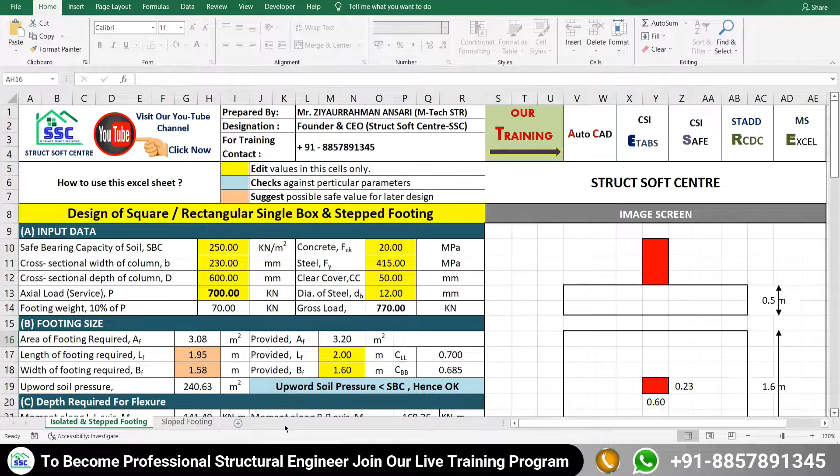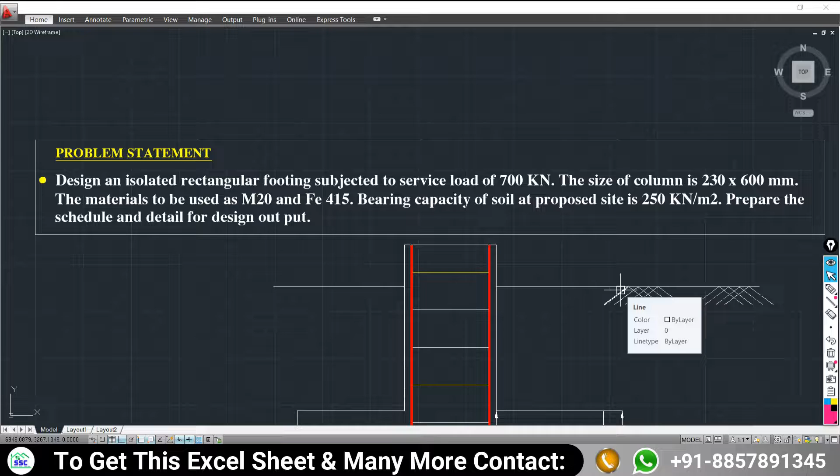So first of all, we are trying to understand the problem statement. We have to design an isolated rectangular footing which is subjected to 700 kilonewton service load, and the column carrying this service load has a size of 230 by 600 mm. The material we have to use for the design of this foundation will be M20 and Fe415. And the most important data, the bearing capacity of the soil at this proposed site, is 250 kilonewton per meter square.

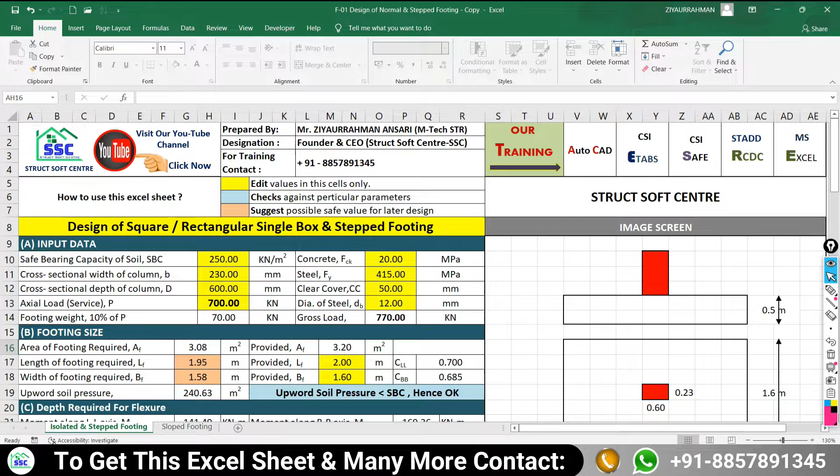And our job is to prepare the schedule and detail for the design output. So to solve this entire problem, we are going to use this spreadsheet. All the basic data first we have to put into this Excel sheet, then we are going to find out the solution, and whatever solution we get, we will prepare the schedule accordingly.

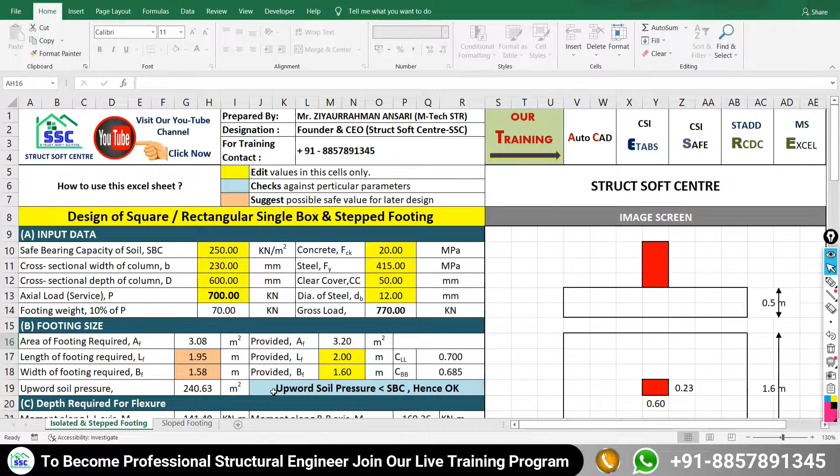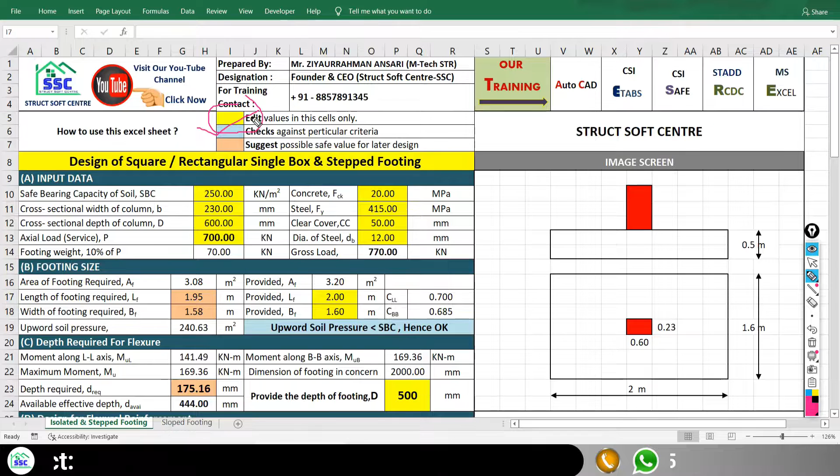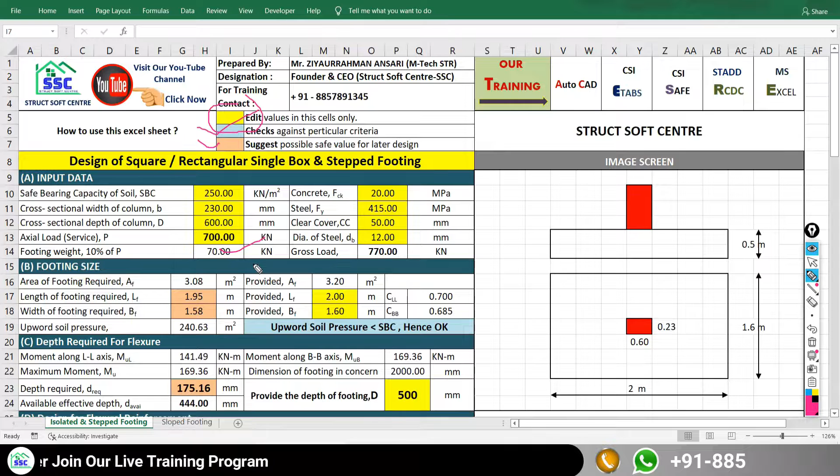So first of all, try to understand how to use this Excel sheet. You have to edit the value only in these yellow cells. The sky blue color cell will perform the checks against the particular criteria, and the orange color cell will suggest the safe value for the later design. You don't need to worry about the white cells because the formulas are fitted in these white cells. Whatever basic values you put in the yellow cells, the white cells will adjust accordingly as per the calculation. So you don't need to worry about the white cells, only put the basic data about your problem in the yellow cells.

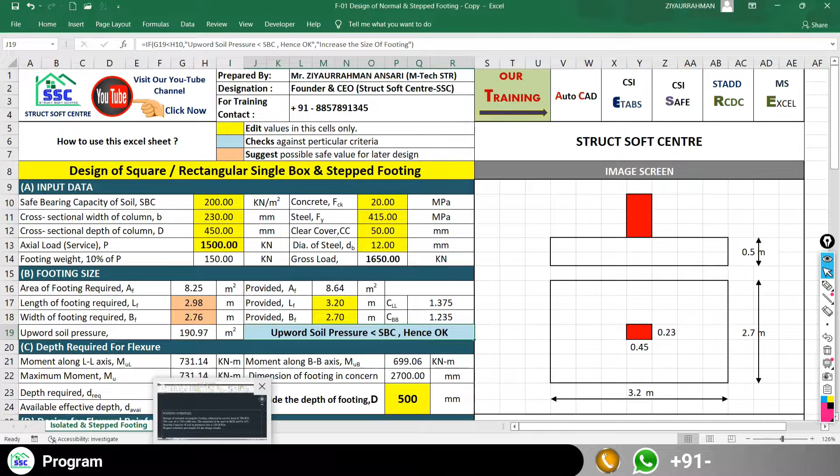Now we have to put here the basic values like what is the bearing capacity of the soil, what is the material properties, what is the section size of the column. So we need to look once more at our problem statement. We have to design an isolated rectangular footing, we know that. What is the material properties? We have to use M20 grade of concrete and Fe415 grade of steel.

So come back to your sheet, and yeah, a drop down list is available, so I can change accordingly. M20, and we have to use Fe415 grade of steel. All the grades of steel are available here, so I am going to take Fe415 accordingly.

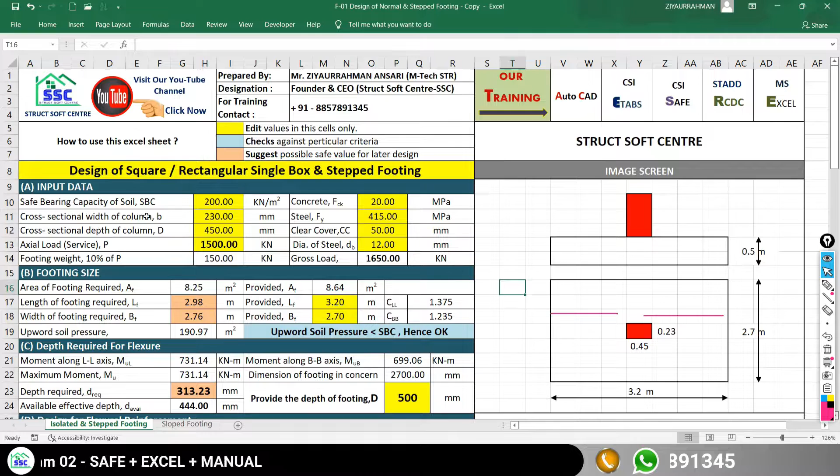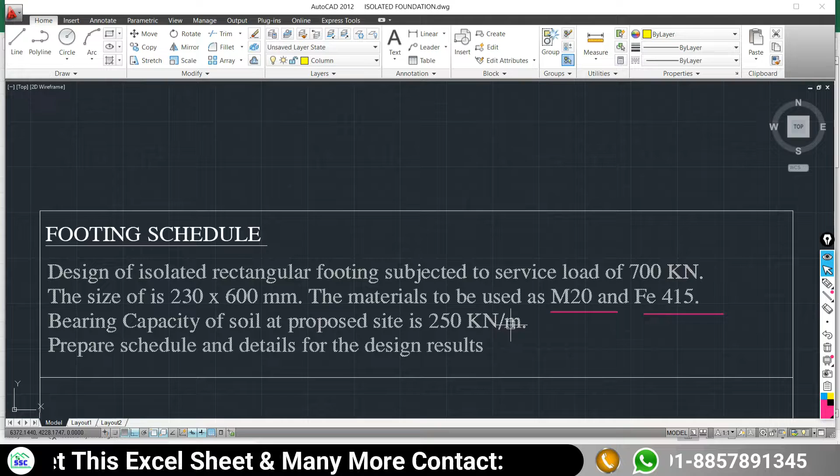Now what is the bearing capacity of the soil at the proposed site for your problem? The bearing capacity of the soil as given here is 250 kilonewton per meter square. So just go back and put here 250 kilonewton per meter square.

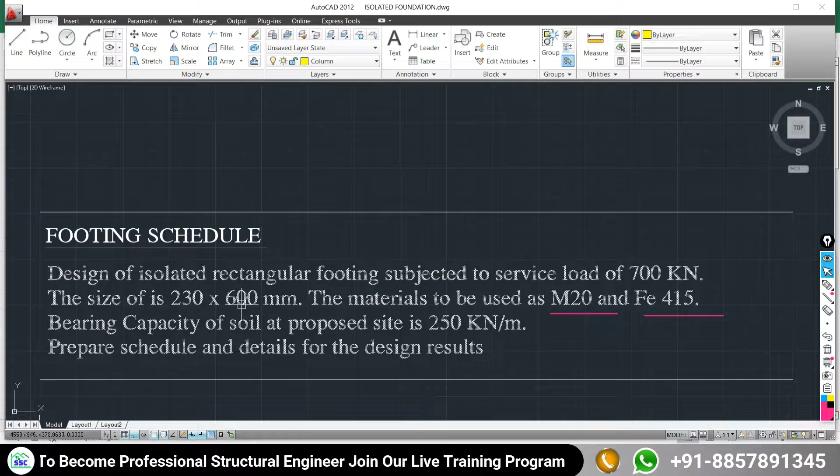What is the column size? The column size is 230 by 600 mm. So just go back and put here 230 by 600, the section size of your column.

How much service load is coming to this particular footing through the column, that we need to know. It is also available in your problem statement. It is 700 kilonewton. So just go back and put here 700 kilonewton.

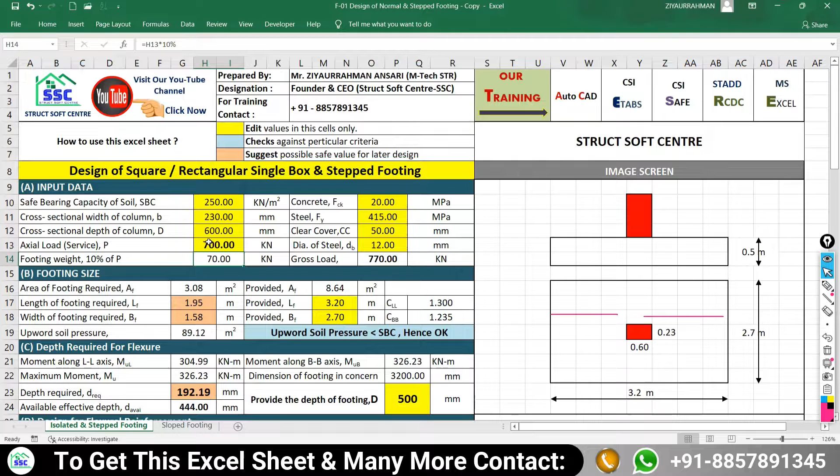Now next will be what? We need to add 10% self weight of the footing. Actually the load coming from the column, this 700 is the service load coming from the superstructure only. But when you are going to impose the load over the soil mass, the weight of the footing will also be added. But initially, we don't know what is the size of the footing, and if you don't know the size of the footing, you won't be able to calculate its self weight.

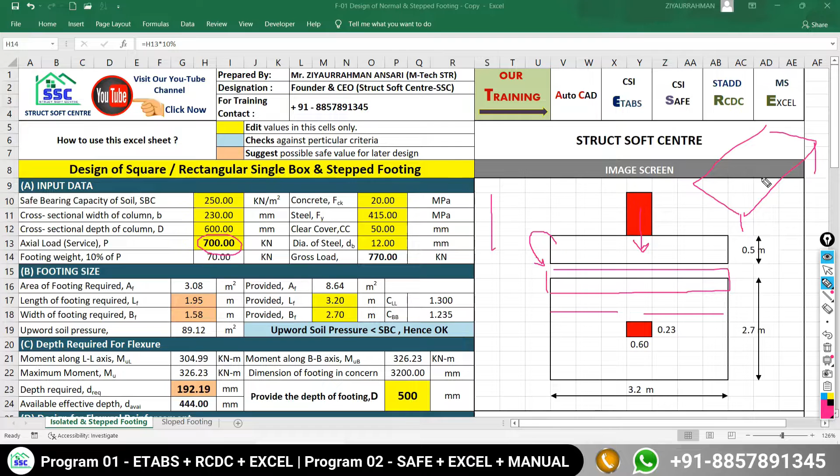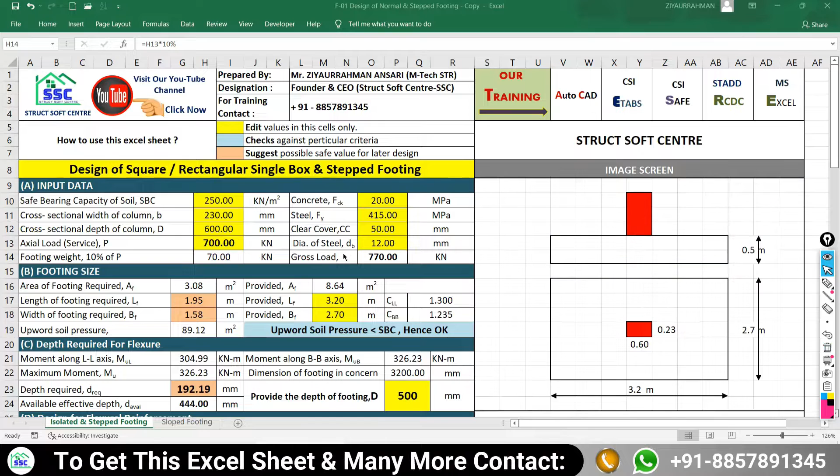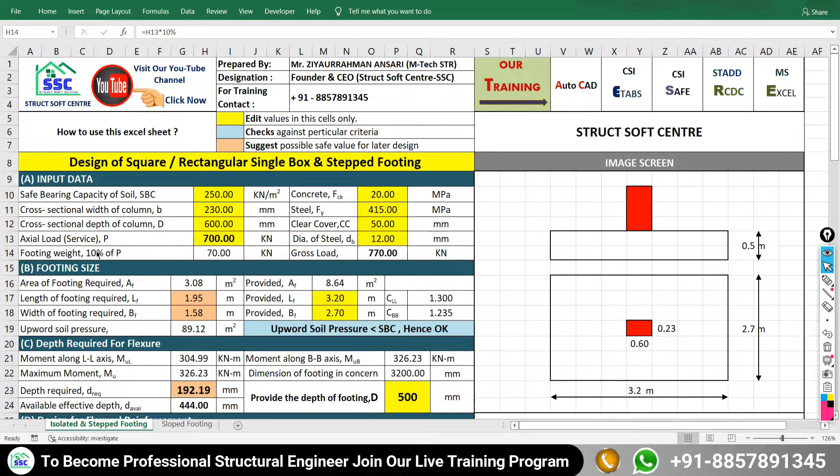Size of footing means what is the length, what is the width, what is the depth of the footing - we don't know that. Without knowing that, you can't calculate the self weight of the footing. That's why at the initial stage, we are going to consider 10% of your service load as the self weight of the footing. If you take 10% of this 700 kilonewton, it becomes 70. This 700 plus 70 will become the gross load acting over the soil mass, which becomes 770 kilonewton.

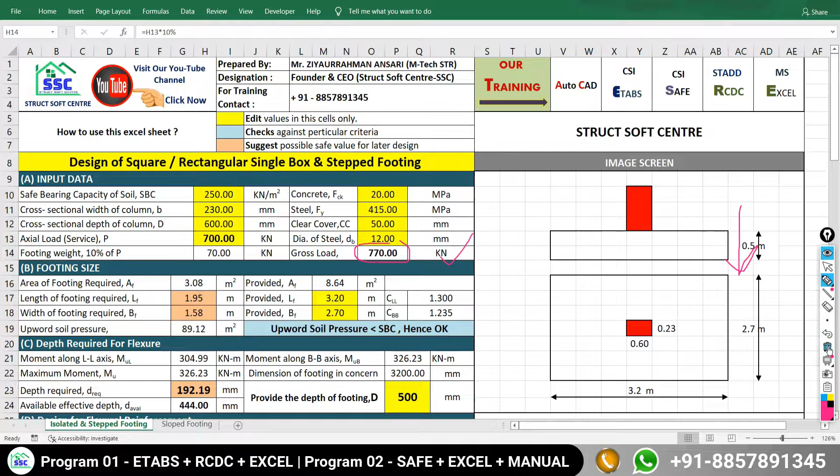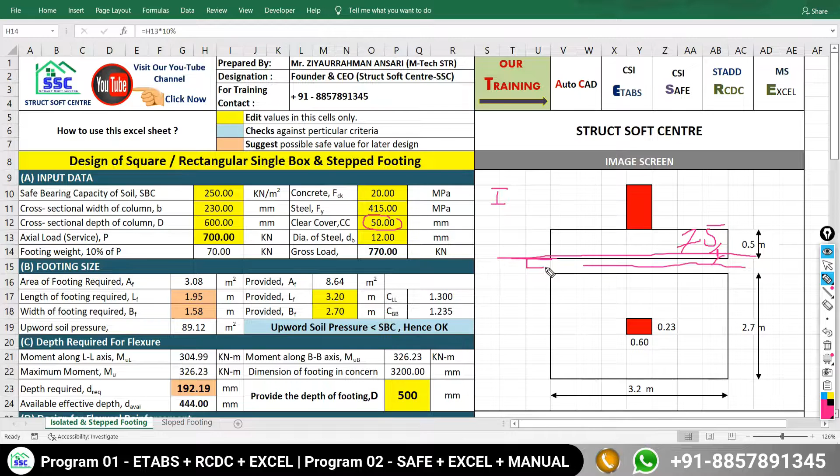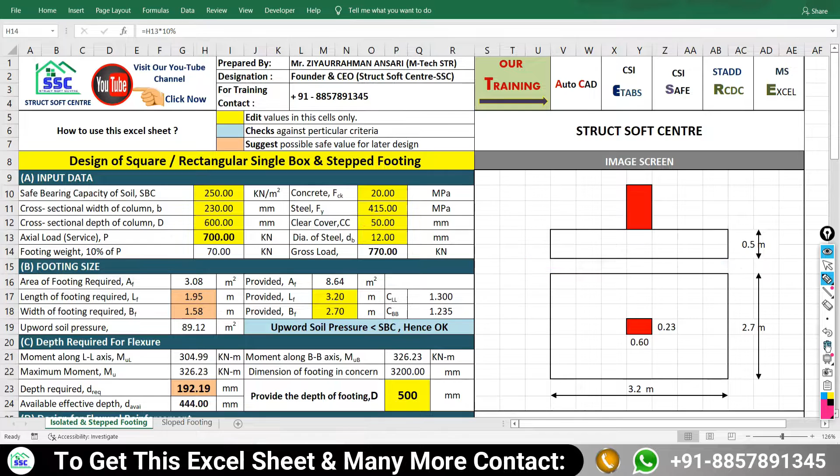Now, clear cover - how much clear cover do we need to take for the footing? As per the IS code, if your footing is going to directly rest over the soil mass, the minimum clear cover should be 75 mm. If you are directly putting your concrete slab foundation directly to the soil mass, 75 mm. But if you are going to provide PCC, 100 mm PCC or 150 mm PCC, at that time the minimum clear cover should be 50 mm. So for all types of footing we normally provide with PCC.

That's why here the clear cover we should take as 50 mm. Okay, so I am going to put here as 50. So 50 value you need to put here.

Then diameter of bar. On preliminary stage, you have to decide the diameter of bar. A drop down list is available: 8, 10, 12, 16, 20 onward. Different diameters of bars are available based on your choice at the preliminary stage. It is not the final one, it is just the preliminary data. So here I am going to take the 12 mm diameter of bar on preliminary stage.

So this is the first basic input data stage. There we have defined all the things as per our problem statement, as per our data. Next to that, we need to decide the size of footing. The very important step is to decide the size of footing, meaning what should be the dimension, width and depth of the footing.

So area of footing required to carry this much loading. Whatever load you are going to put, we need to find out the safe area of the soil, safe area of the footing, so that your load will be carried by your soil mass.

So area of footing required is 3.08, and what suggesting value are we getting? As I told you, in the orange cell it will suggest the possible safe value. It is suggesting for making this design safe in respect of the plan dimension of the footing. So it is asking to provide 1.95. It is giving the idea of what length we should take, so it is suggesting 1.95.

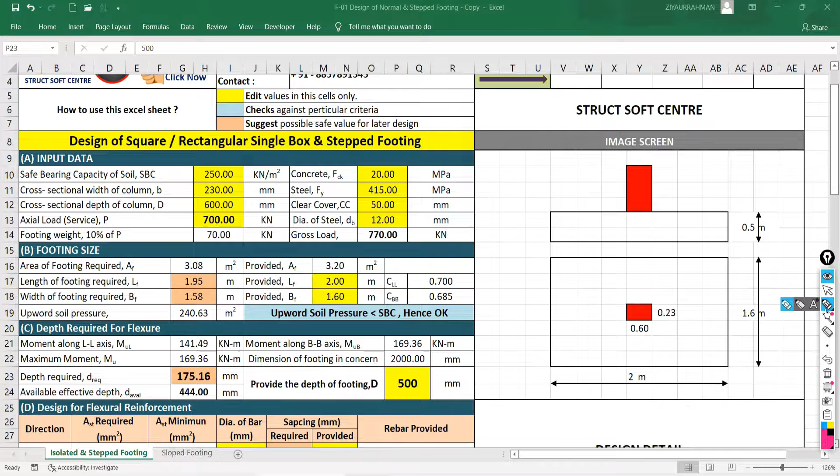Now along the length of the footing, how much area of reinforcement is required? AST required for design purpose is 907.08 mm square. Now the minimum reinforcement to be provided along the length of the footing is 960.

What is the minimum area of reinforcement for the footing? As per the code requirement, the minimum criteria should be 0.12% of B into D. If you calculate the minimum area of reinforcement required by this formula, you will get the requirement of minimum as 960.

Now the problem here is we have the design requirement and we have the minimum requirement. Always, in comparison of these two requirements, we have to go with the maximum one. So minimum is the maximum one here, so we have to provide at least this much reinforcement. In some cases, if you get more reinforcement for the design purpose, you have to go with that.

Now, as per the diameter, the option is available - a drop down list of diameter of bar. If I take 10 mm diameter, 130 mm spacing is required for the safe design. If I use 12 mm diameter, 188 mm spacing is required. If I take 16 mm diameter, 335 mm spacing is required. If I use 20 mm diameter, 523 mm spacing is required for the safe design.

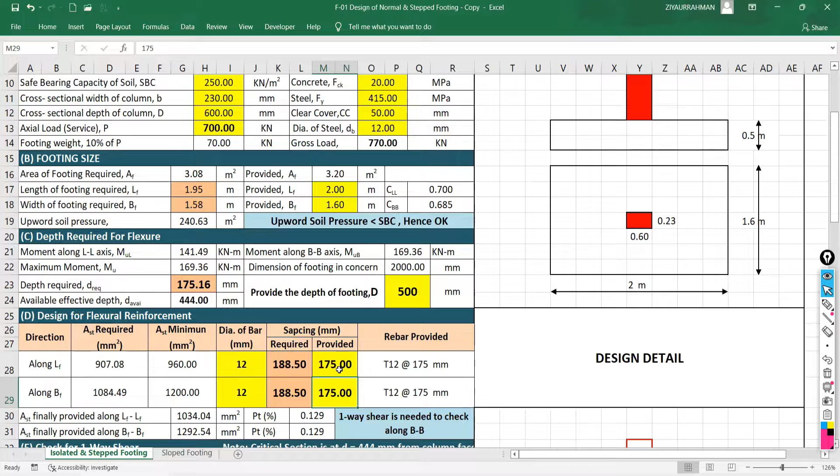Everything is now completed. Now we have to check whether the design is right or wrong. So let's check for one-way shear. Along the length of the footing, we need to check how much critical shear is there and how much nominal shear is there. Your nominal shear will always be less than your critical shear, and getting that means the provided depth is safe for one-way shear along the length of the footing.

Next, along the width of the footing, the critical shear is 0.27 and the nominal shear we are getting is 0.2. What does nominal shear mean? At a particular section at a distance of d from the face of your column, the actual nominal shear coming is 0.2, and the capacity of this section is 0.27. Obviously it will be safe, so it is now safe for one-way shear.

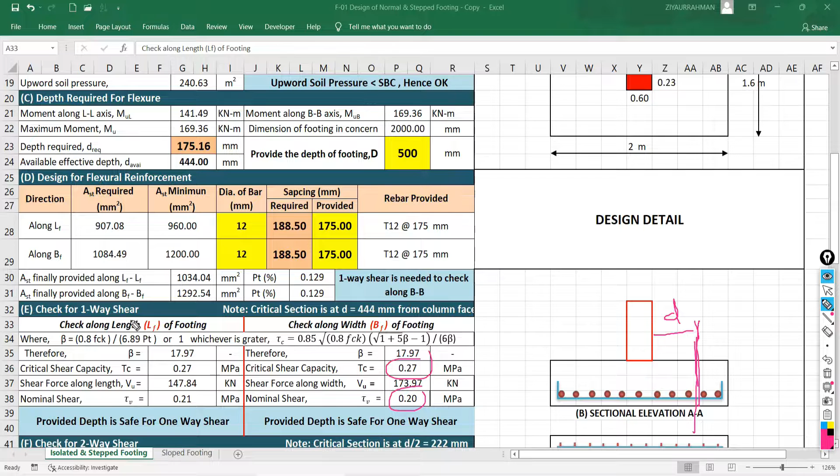Now we need to perform the check against two-way shear. For the two-way shear, we need to perform the checks at a distance of d by 2 from the face of your column. So at that particular section, at a distance of d by 2 from the face of your column, what shear value are you getting?

901. What is the perimeter of your shear area? The span of the perimeter length of your shear area is 3436. Then the nominal shear coming at that two-way shear section is 0.591. This much shear is there. And what is the capacity of that particular section for shear? It is 0.988. That is giving us: provided depth is safe for two-way shear.

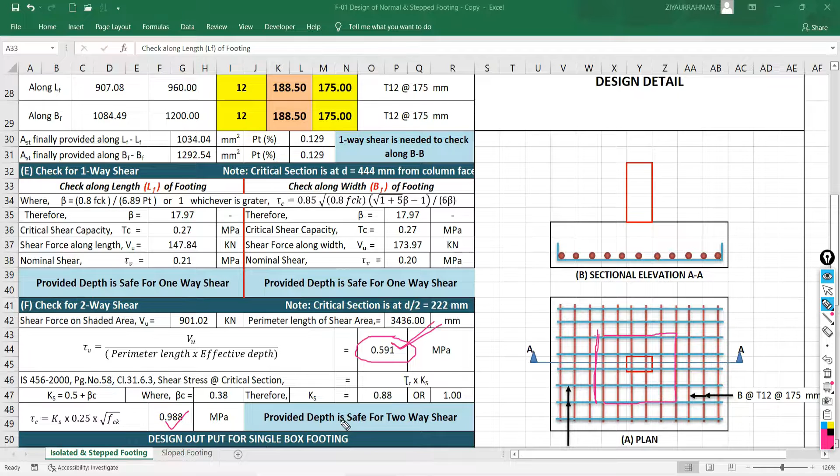Then, finally, we are having the design output. Your width of the footing is 1600, your length of the footing is 2000, and overall depth provided is 500. Reinforcement along the width of the footing is 12 mm diameter at a spacing of 175 mm center to center, and along the length of the footing it is also 12 mm at a spacing of 175 mm center to center.

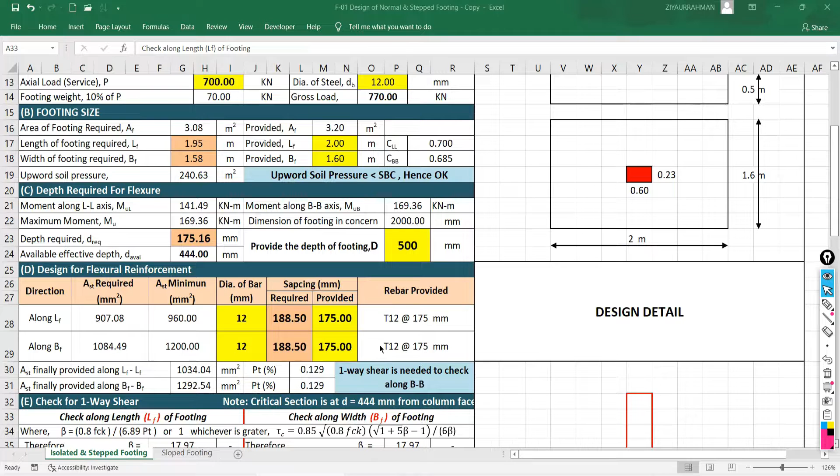In any problem, when you are using this Excel sheet, suppose your depth is not safe for one-way shear, then what you need to do? You need to go back to this stage and increase the depth of the footing. In some cases, suppose your design is not safe for two-way shear, again you need to go back to your depth and increase it. Accordingly, you have to play with this Excel sheet and take the final design output from it.

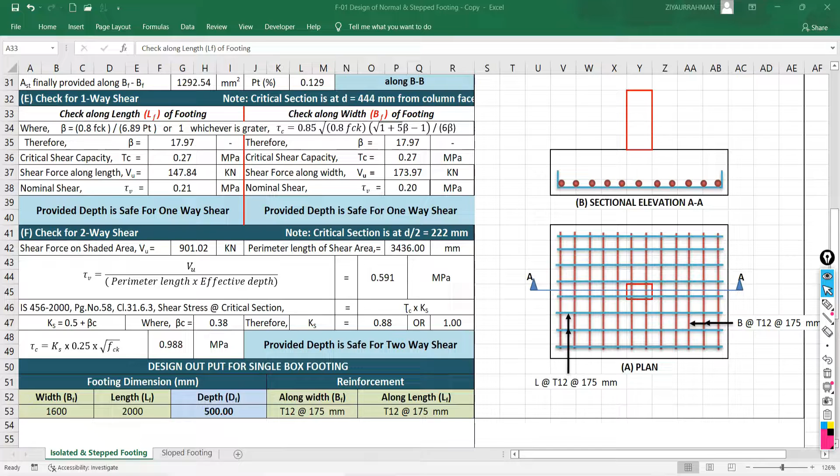Once you complete your design, you can prepare your schedule like this. This is the plan data: the length of the footing is 2 meters, or 2000 mm, and along the width of the footing it is 1600 mm.

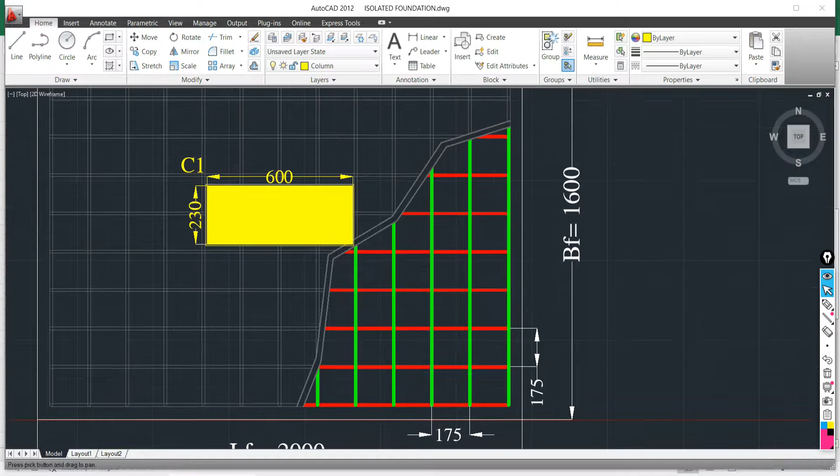In this way we are going to represent the positioning of the reinforcement. Along the length of the footing, spacing is 175. Along the width of the footing, again the spacing is 175, along with the diameter of the bar. This is the final schedule.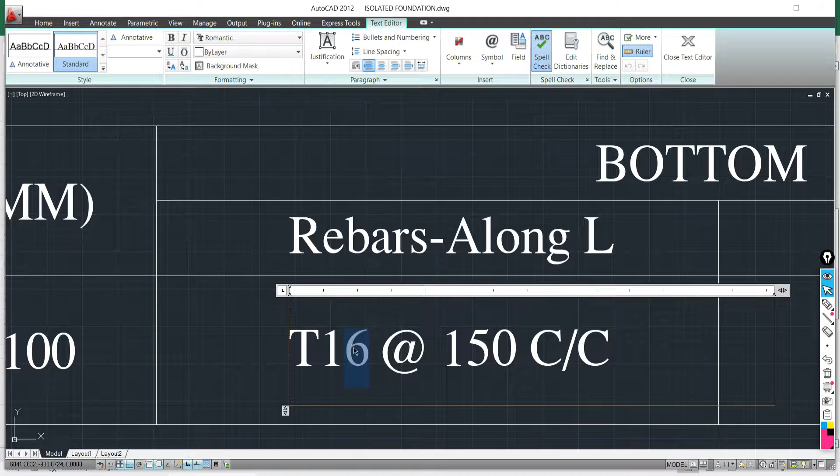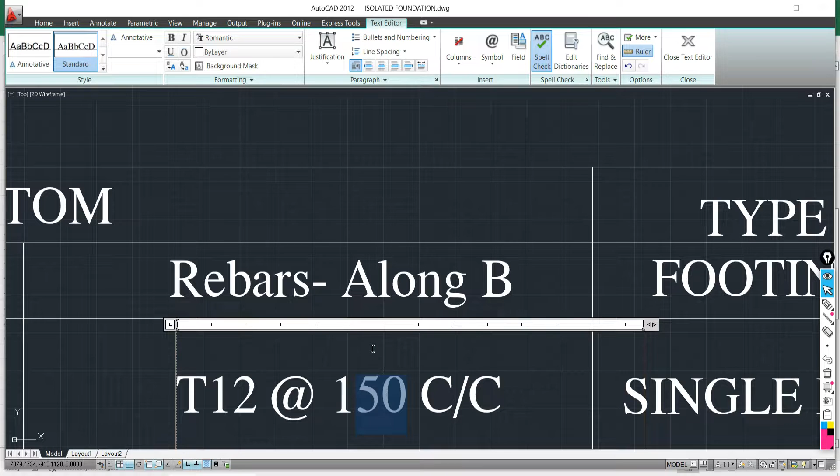So this is column first, with section size 230 by 600, and it is footing first, with its length and width of the footing and the diameter. So the final diameter is 12 mm at a spacing of 175 mm center to center. Along the width also, 12 mm diameter of bar at a spacing of 175 mm center to center. It is a single box footing.

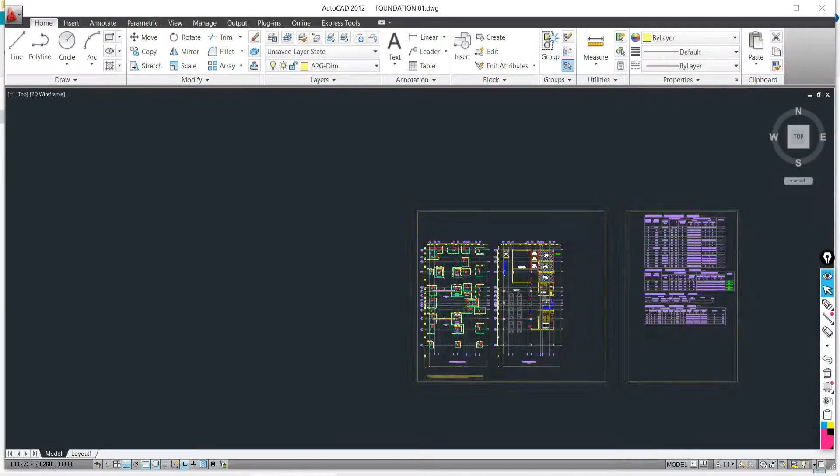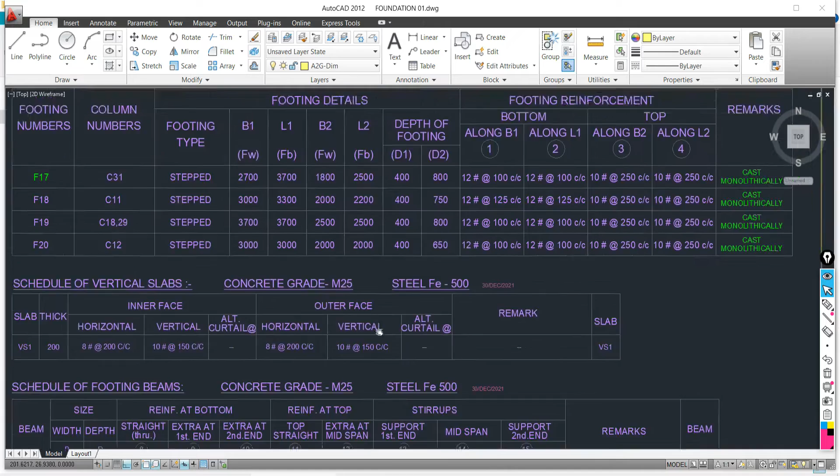So in this way we have to design isolated rectangular or even square footing using this spreadsheet. Hope you all understood everything we covered in this explanation. Now you can finally prepare this kind of complete project for the design of isolated rectangular square footing, and prepare this final schedule. This sheet is very practical, and any kind of rectangular square footing you can design using this spreadsheet. Hope you all enjoyed this session. Thank you.